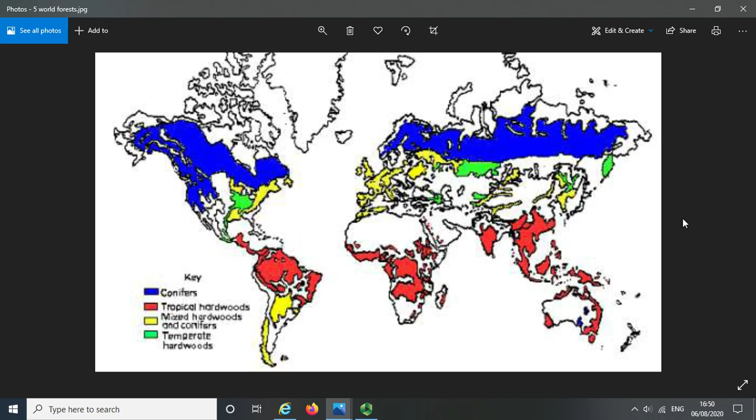Here's a kind of distribution map of hardwoods and softwoods throughout the world, and you can see fairly clearly that the northern hemisphere produces the vast majority of conifers, and the southern hemisphere produces the vast majority of tropical hardwoods, which is interesting in itself, and I'm afraid I don't have the reason for that, but when we're thinking about putting buildings together, that map might be relevant.

The other thing that's relevant to timber is how sustainable it is. It is the only renewable construction resource we have in the world, after all. It is the only renewable construction resource we have, and so how can we best use it?

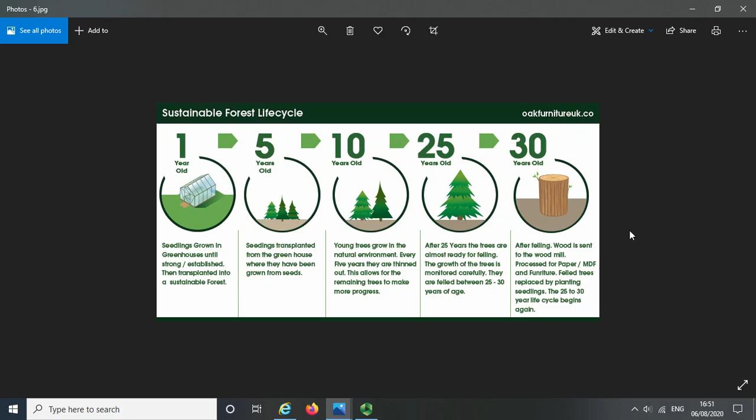What you're looking at is actually a kind of growth chart, I think mainly for softwood timber, and softwood timber is fairly rapidly growing, which is why we can harvest it at about 30 years, and certain kinds of tree grow in a very particular way, like straight, which is useful. Pine, for example, is a very useful tree for the construction industry.

Schauberger was the son of a logger. His father felled trees up in the hills, chopped them into logs, and sent the logs down to the lake through things that are called log flumes. The flumes were little channels that you put the logs into, and they went down to the bottom to the lake.

Now, you would think the quickest way from A to B is a straight line, but what happened was the logs, as they travelled down these flumes from the top of the hill down to the lake, would crash against the sides quite dramatically, and by the time they got to the bottom, only something like a third of them were still in a decent state to be usable. The others had broken quite dramatically.

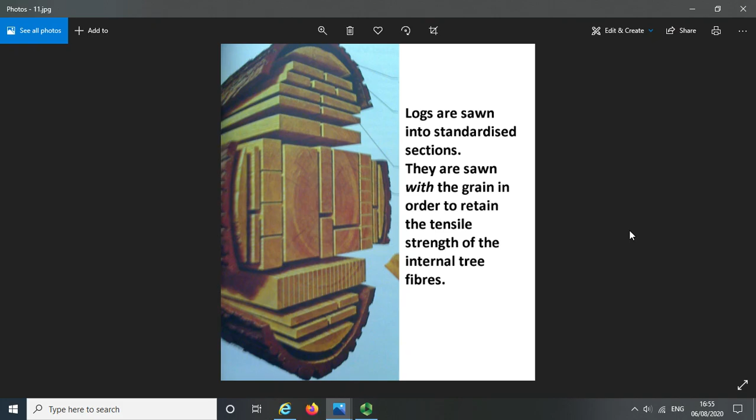And at the logging mill, they are sectioned into standardized shapes. And again, you already know that you work with the grain along the long length of the timber. You don't work against the timber, you work with it, because the fibers, as I mentioned in an earlier lecture, run linearly along the length of the tree, and we need that tensile strength. And so that's how the tree gets broken down.

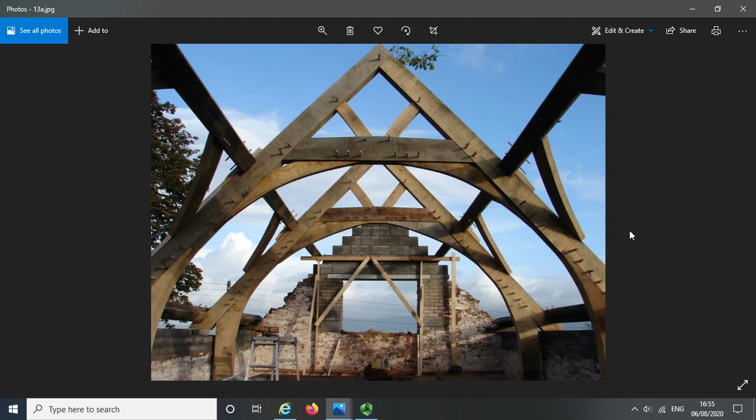And of course, sawn timber is still used in construction. This is a cruck frame, C-R-U-C-K frame, a very traditional way of, sort of an A-frame structure, a very traditional way of putting a timber frame together. It's doweled, as you can see. There's no metal, there's no screws or bolts used in this particular structure. It's a very nice way of putting wood together.

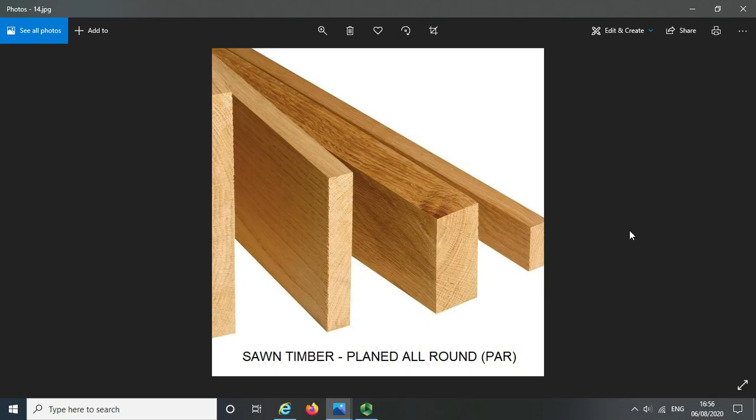And then the next processing of timber, as again I know you already are aware of, is to plane it, to put it through a machine that makes it, if you like, planar, much flatter all round. And then of course you put it through another machine that can actually profile the timber for you.

Now, the majority of timber that we use in construction nowadays will be engineered, and that means that it will be processed. It won't be sawn timber. Yes, we will use this, but generally speaking, it will be engineered, and that means taking small sections of timber and reassembling them, laminating them together. So it's sort of interesting.

Now that's fine, but when you cut that down, you will get a kind of general even distribution of loads and forces in the tree, and suddenly you will get what we call in English a knot in the system, and suddenly it's a lot more dense. Now, to redistribute knots and to make any piece of timber evenly able to resist load, you cut it into lots of smaller sections, and you redistribute the knots so that they're evenly distributed around the section, and you will actually have a stiffer and stronger length of timber.

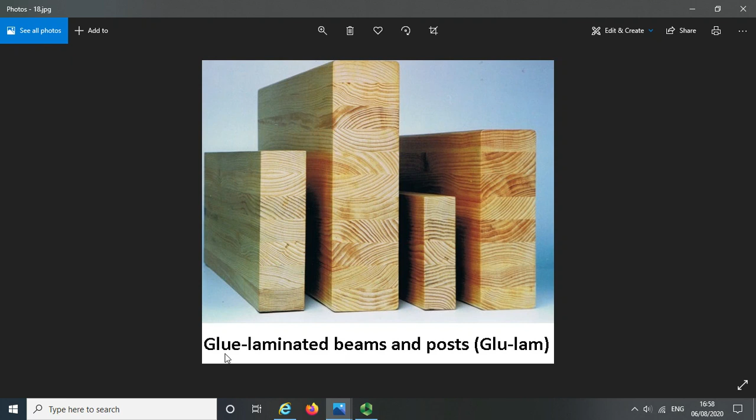Not only that, of course, if you're in an environment where you can only grow short lengths of timber for one reason or another, assembling, gluing, laminating timber together to make bigger lengths makes a lot of sense. So you might know the expression glulam, usually it's GLULAM, which we put together beams and columns with. Here's some traditional glulam.

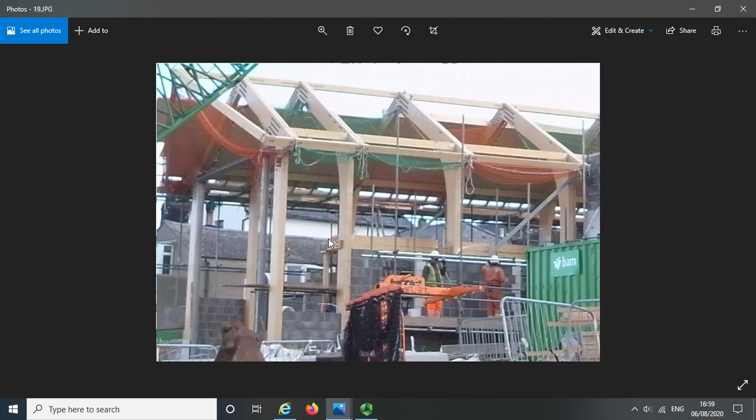Here's a glulam vault, a series of glue laminated arches, vaults. This is a Hopkins project actually, for a grandstand at the open air cycling velodrome in Herne Hill in South London. Really rather elegant use. I've never been sure whether these are strictly necessary to carry the cantilever. They probably are. These are cast iron columns, as you can see. They were apparently already there for the old pavilion, and they wanted to reuse them.

Excuse me. There you go.

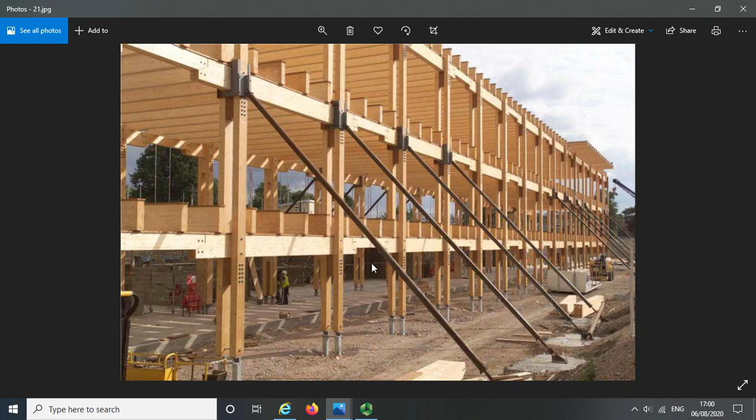So here we have a complete, if you like, orthogonal structure made from glue laminated engineered I-section beams and glulam columns. Interesting again, and I cannot emphasize enough this process of doubling, which is going on here, and also this process of keeping timber off the ground with a nice scarf joint connecting down to the foundations. So that's a good critical detail.

The doubling is important because you're taking mass away. You're reducing the amount of material that you use. We'll see this time and time again in structure, breaking it down into smaller elements. I nearly said elephants. Into smaller elements, and combining those together again. You're making a space frame, and the principle of a space frame works extremely well.

Of course, the other lovely thing about glulam is that you can laminate it into bending. So you set out on a bench the curve that you need. You put your first thin strip, you bend it into shape, you lock it into position. You glue your next strip, and actually the moment the second strip is glued onto the first strip, they lock together and the curve is made. The curve forms. It will not change then, it will not bend, and so on until you have a structurally efficient curve.

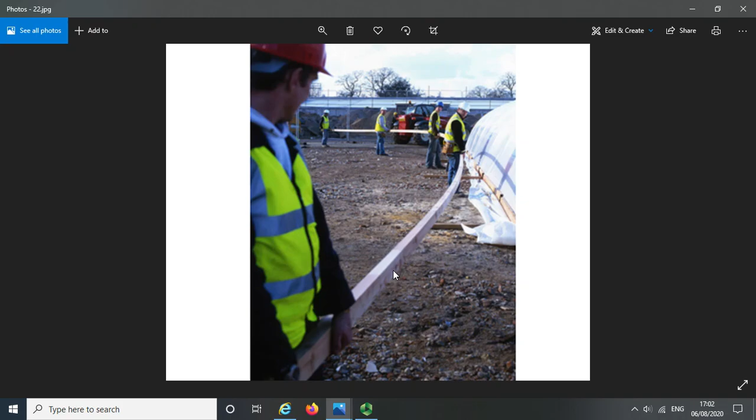I think this is one of the longest glue laminated sections that I have come across. And as I think I've mentioned before, bringing materials to site is a very energy intensive process. Wherever you're working in the world, it's always good to think, why can I source local materials and avoid all the energy that's needed to bring materials to site. But if you do have to do that, and you've got a relatively straight road, which I imagine you need in this place, the efficiency of building a long span beam, which this is going to be, could be to your advantage.

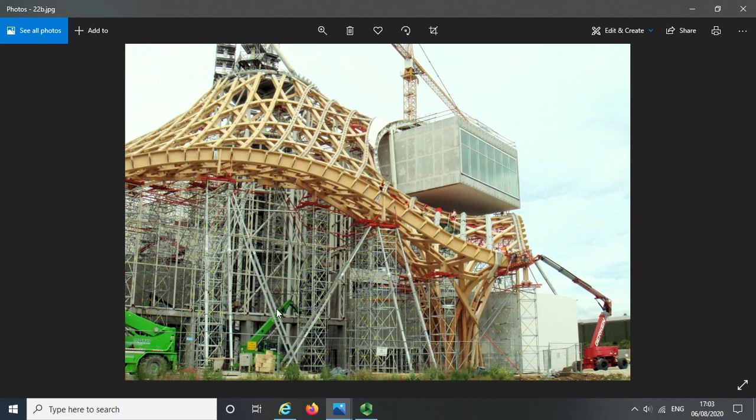So here's an interesting project, Pompidou Metz, using that principle of putting glue laminated sections into bending. Sorry, might be worth another look. I'll come back to this because this timber is actually held in tension by the shaping. This is not glue laminated in the way we're looking at just now, because again, here's the doubling. Can you see the doubling going on in both directions? And that's nice because you can kind of weave the material by allowing one direction of the weave to slot through the material that's going in the other direction.

The edge beam is critical because that's what in a way sets out the overall structural logic of the building. The overall geometry is controlled by the edge. It's exactly the same with tensile structures. You know, the wire rope along the edge is controlling the shape. So just to distinguish, all of what we were looking at just now was what we call glue laminated timber, glulam.

Sorry, my computer's being very slow to react for some reason. Not reacting at all now. Oh, there we go.

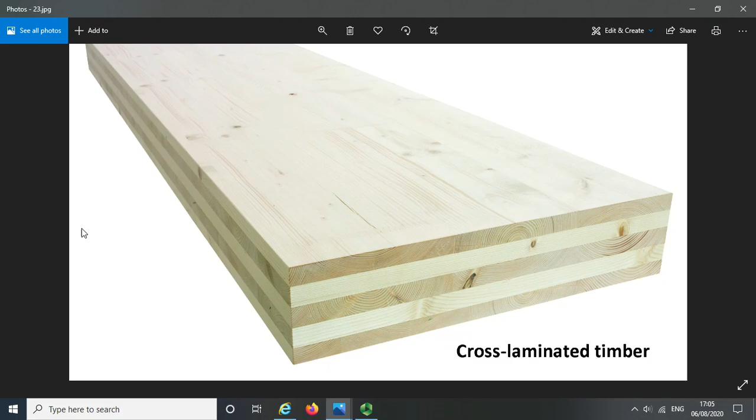Apologies for this. So what I was going to say was that we have to make a distinction between the generic description glue laminated timber and a development of that which is cross laminated timber. The difference is that with what was traditionally known as glue laminated timber, the grain of the timber was always in the same direction. You're just cutting it into smaller sections and reassembling those sections to make a longer piece of wood. With cross laminating, you're alternating the direction of the grain. Can you see that's going in that direction, that's going that way, and that's going that way? A little bit like the tradition of plywood, I suppose.

And what that's doing is giving you strength in all sorts of directions. So it becomes more like a floor or a wall, more like a load-bearing panel. So I'm going to use the phrase cross-laminated timber for long planar sections, and I'm going to use the phrase glue laminated timber for columns and beams. And I hope you can get your brains and mouths around that.

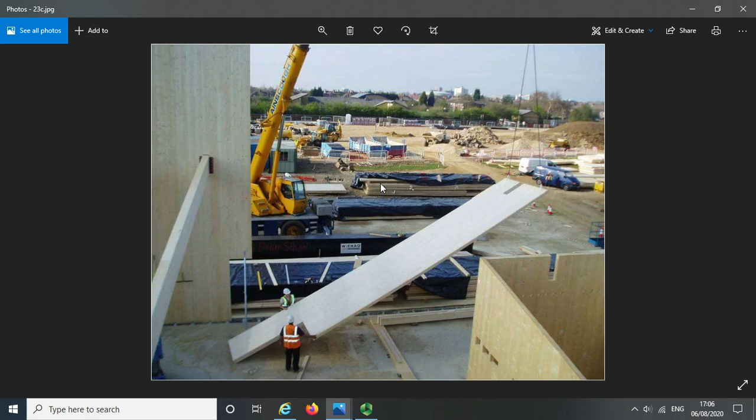Here's some more CLT, cross-laminated timber. More and more this is going to be the way that we put buildings together. So this is now a load-bearing wall made of CLT. It's actually a load-bearing wall. So we go back to that principle of masonry, stone, brick, reinforced concrete construction, where you're carrying floors and walls off load-bearing walls. Here's a combination of the two.

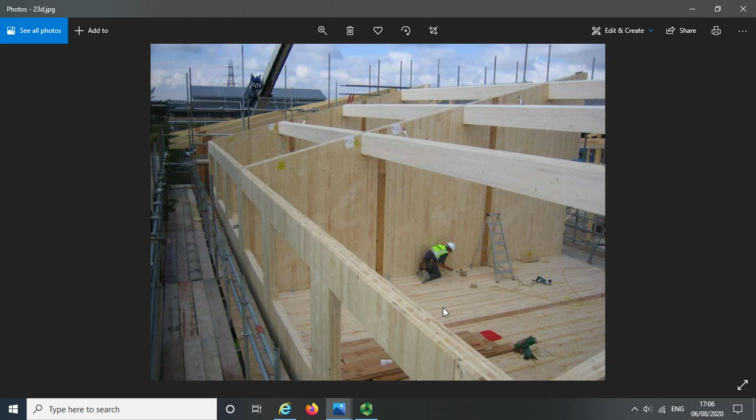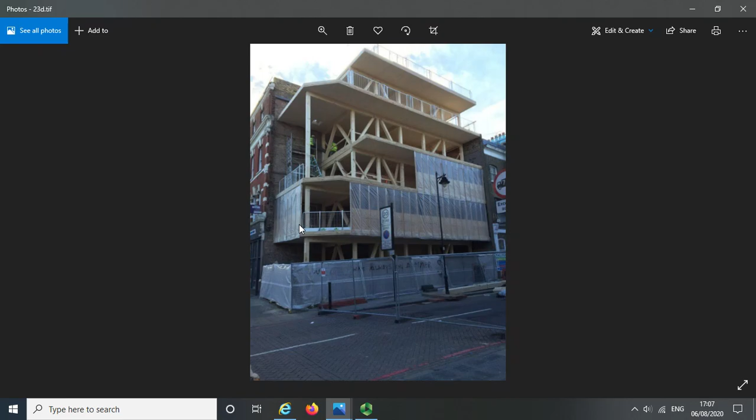I don't know if you can see, you can see the little knots in the timber that generally are redistributed, so they're evenly distributed around these sections. This is a nice project, which I will describe in a later lecture in more detail, by Amin Taha. And these are glulam columns. These are CLT, cross-laminated timber floors.

It just shows you what's going to happen here: all of this is temporary structure. There's going to be some outer walls which are actually precast concrete sections, rather interesting precast concrete sections, which will eventually carry the floors. So there's some temporary engineering going on here, isn't there? All of this is going to disappear. Again, when you're looking at your own projects, think about temporary engineering. Think about this process of how it's going to work.

They couldn't have put up the concrete walls first. It just wasn't practical. This is an awkward infill site, as it happens, in Islington, North London. So what do we have to do? We put a temporary structure in. We build the CLT floors. Then we put the walls in place, and that's what the building looks like in the end.

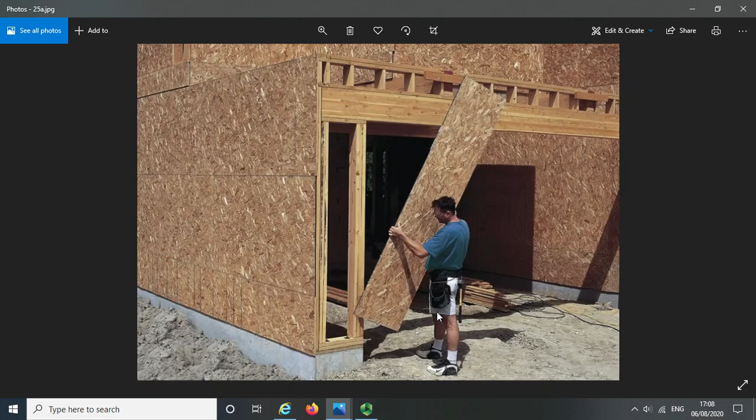And there's a nice detail, I haven't got it here, sorry, which is the junction of the edge of the CLT with these precast concrete sections which make up the outside facade. Lovely, nice, delicate little project, very interesting. Of course, again, a series of boards and sheets. I'm not going to go into this in a lot of detail because you know what these are already.

Again, whoops. I want to just remind you that although timber is of course the most sustainable material we have, it needs nurturing, it needs looking after in certain ways. Ideally, in an ideal world, you would always enable timber to be well ventilated, to get air around it. It doesn't want to get too wet and it doesn't want to get too dry. It needs to almost be alive. So we use the expression seasoning.

Okay, so even when it comes from the sawmill to your local timber merchant, it's gone through a process already where it's been dried. The water in the timber, the moisture in the timber, evaporates naturally, or it's actually artificially evaporated using kilns to heat it.

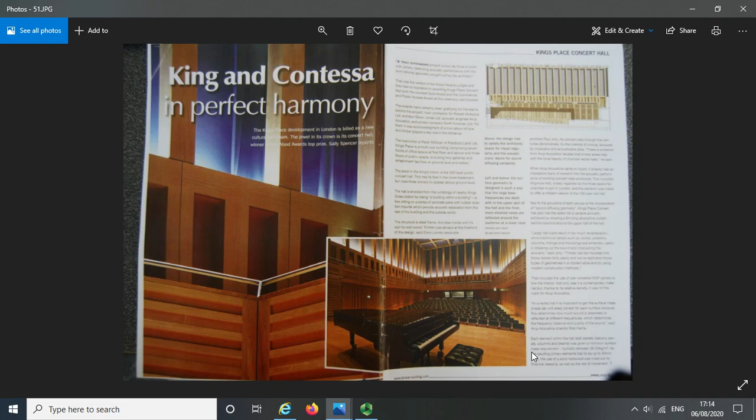the architects involved in this project went to the forest and identified a particular tree, gave it a name, which you would. I think it is La Contessa, King and Contessa, yeah. You give the tree a name, and you harvest that tree, and you use it in every way you possibly can. So this isn't a piece of engineered timber, including the veneer, even finally taking an edge off the tree to make veneers. That tree becomes an auditorium, and I think that is a very elegant project, isn't it?

Yeah. So I'm going to now move on to just a few points about connecting timbers together. While I think about it, I'll go back a second. While we're back on generally, there are now hardwood timbers that I'm not sure whether they're being genetically engineered or whether they've just been discovered, that grow a lot faster, pretty much almost as fast as softwood. I'm thinking, for example, of tulip wood, which is also known as poplar, grown in the USA, and they say they can grow a hardwood tree in 30 to 40 years, which is interesting.

Now, if you look on the data sheets that we've provided for you on your Blackboard website, you will see there's a lot of links to very good timber websites. One is just a general database of all timber types. So that's interesting, because wherever you're working in the world, you can look at your local forest. So if you have got timber growing, you think, what can I usefully do with this timber? There's a number of

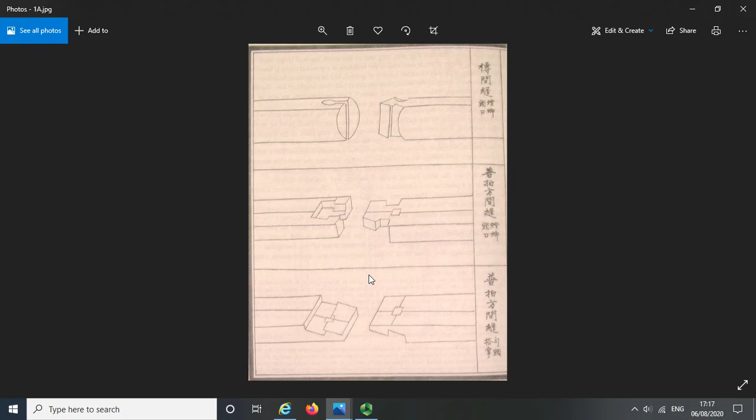So yeah, just a few quick things now on how you join timber. Joinery, the traditional way. Interesting because it dates back. That's a scarf joint, by the way, joining timber end to end, which has always been awkward. That can resist pulling away, can resist tension, can resist torsion, and can resist compression. This is at least 1,000 years old. Chinese drawing, I beg your pardon, of timber joinery.

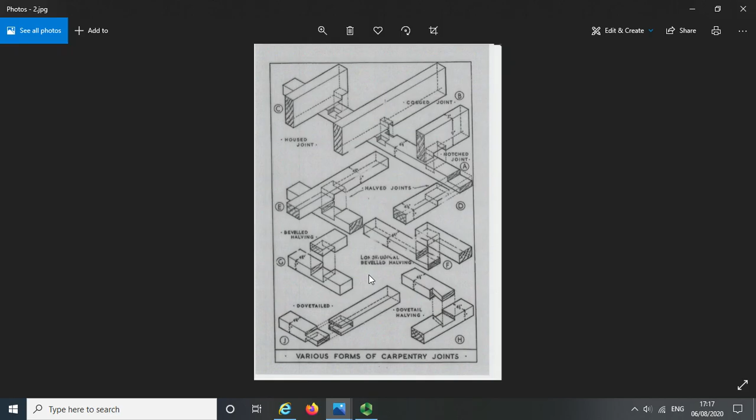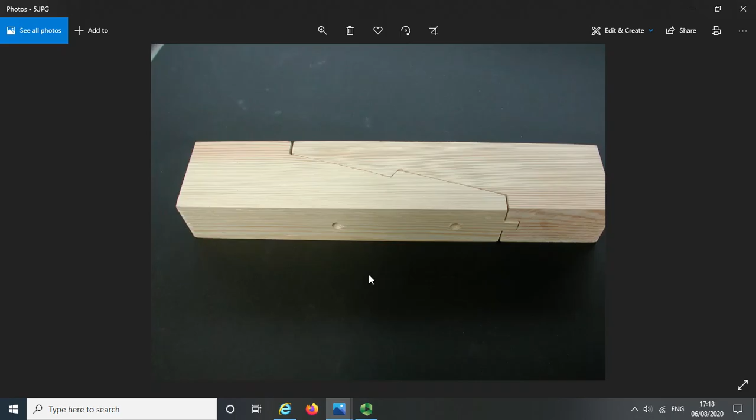The good thing, of course, about joinery is that you're just using the one material. We talk about dry joints. This is a dry joint. There's no glue, and there's certainly no other materials. There's no steel, there's no nailing, there's no screwing. So you're just working with the material itself. What an interesting way to put architecture together with dry joints. Oh, here's a scarf joint. Sorry about that. Oh yeah, here's another one.

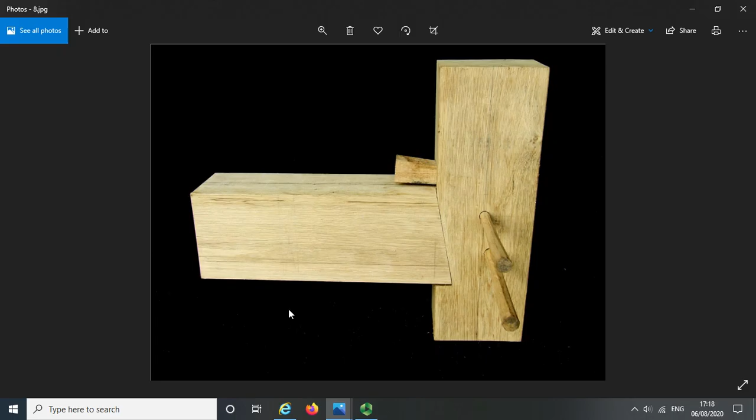This is a nice detail on this scarf joint. So you can see if you try and pull on each end, it's going to resist, to some extent, the pulling. These dowels help. Often they'll put what's known as a butterfly joint in here, and that will be hardwood. So this could be softwood, that'll be hardwood. Here's a dowel which is hammered in, and this is a lovely little wedge. And often they would use hardwood for this wedge.

Once that was flush with the surface, as you can see, you'll get a circle and you'll get a rectangle of a slightly different color timber within that circle. I'm sorry I haven't got an image of that, but it's a very nice, very elegant way of joining timber. And there's a nice trick.

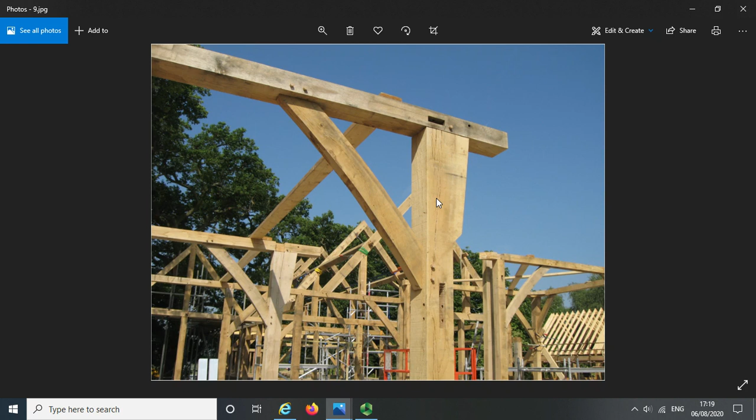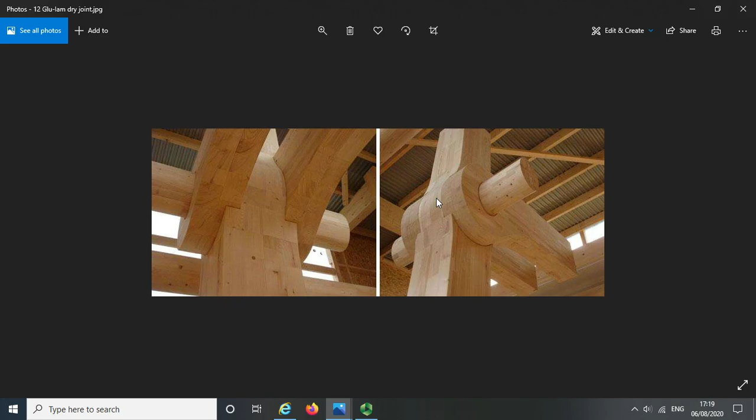So there's a lot of complexity in this, and that's an engineered timber version - this is green oak, obviously using sawn timber, and here's the engineered timber version of it. By the way, in your study materials there will be a PDF of a lecture from WIEHAG, who are the biggest engineered timber manufacturers in Europe.

They're in Austria, and you can have a look at that PDF. I'm not going to go into too much detail here about metal connectors - I'm sure you're very well aware of them. Just reminding you of the importance of keeping timber off the ground.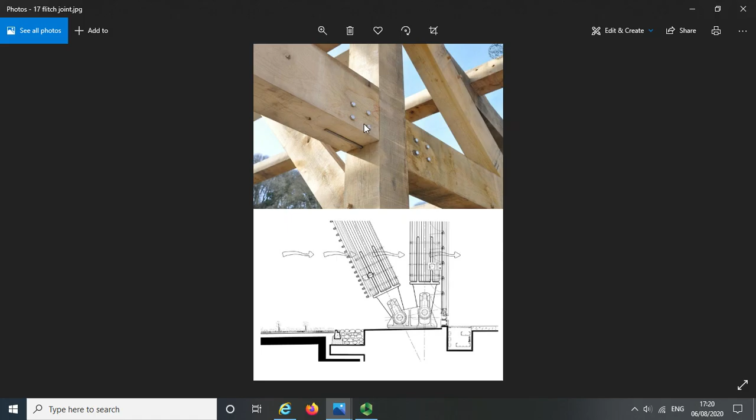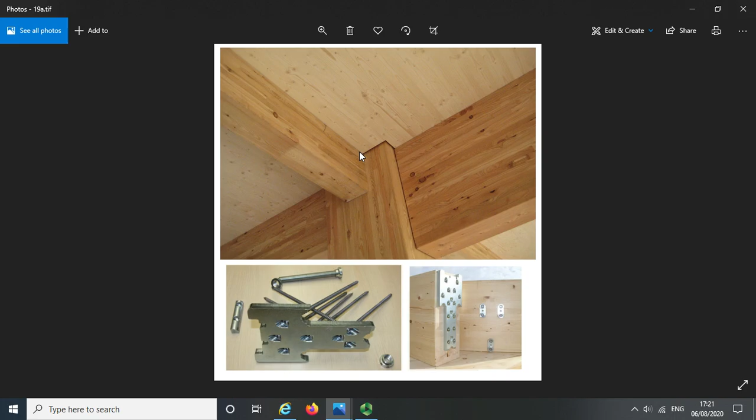These are nice, they're called flitch joints - F-L-I-T-C-H - where you slice into the timber and make the connection. There's a pin joint doing that. Very nice detail if you do have to use steel in your connectors. That's actually from the WIEHAG factory, where they're joining some huge curving glulam sections that are going to become vaults with a flitch joint, the same kind of joint. They like to do this clever stuff where you end up with steel connectors but you don't see them. We would like you to be thinking about these kind of details.

This is interesting because there's a couple of things going on here that I've often talked to students about. This is the Downland project by Ted Cullinan, Edward Cullinan Architects, some years ago. It's a beautiful barrel vault, but offset arches, and you can see the doubling process going on here, because the timber members are thin enough to flex.

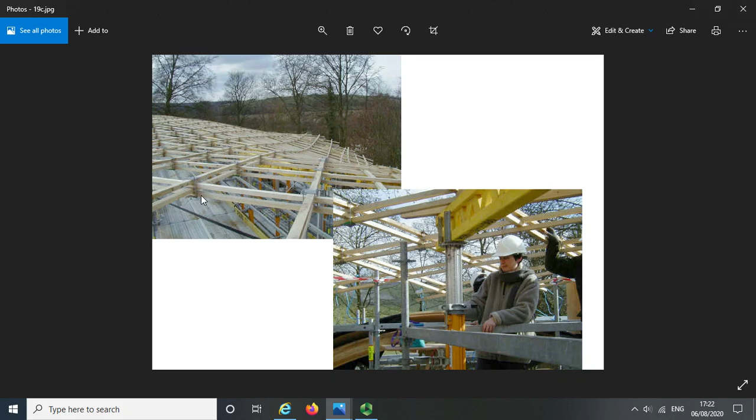It's actually built flat - that grid was built flat on the ground, and then as you can see it's propped up. These pneumatic posts gradually push the vault into position, and then two things happen when it's up. One is it's locked at each connection by this detail. As I've often said - it wasn't me that said 'God is in the details', Mies van der Rohe did - but the architecture is actually this little node here, which locks the two. It's the beautiful doubling of the timbers going through, and the design of this bespoke node. And of course at the ground level, which you can't see here, it's locked by a concrete foundation at each end, which stops the vault from splaying out in either direction.

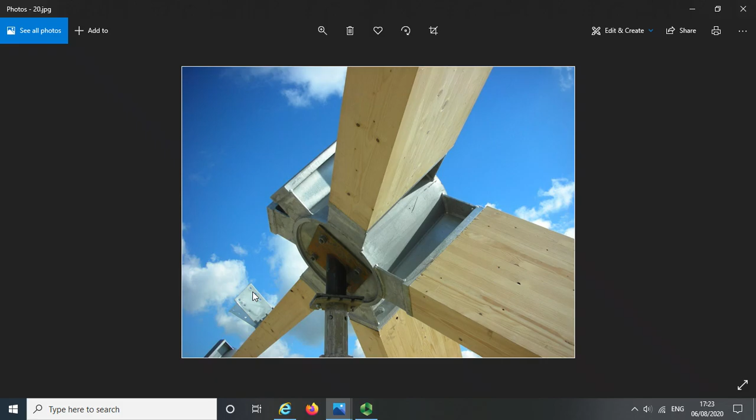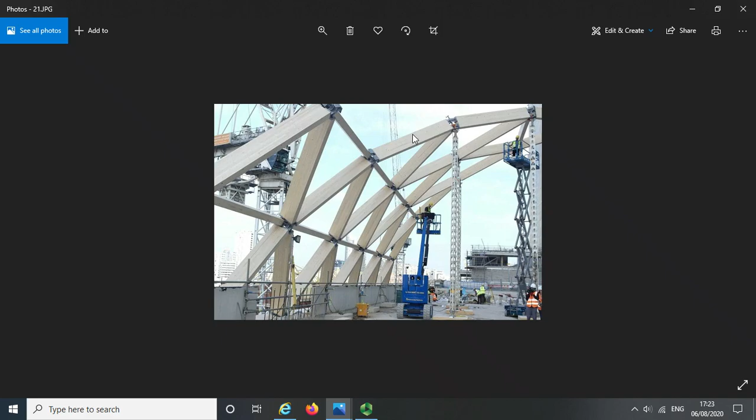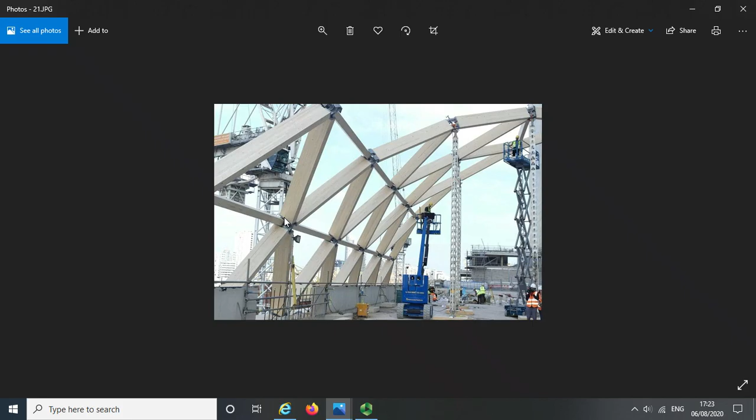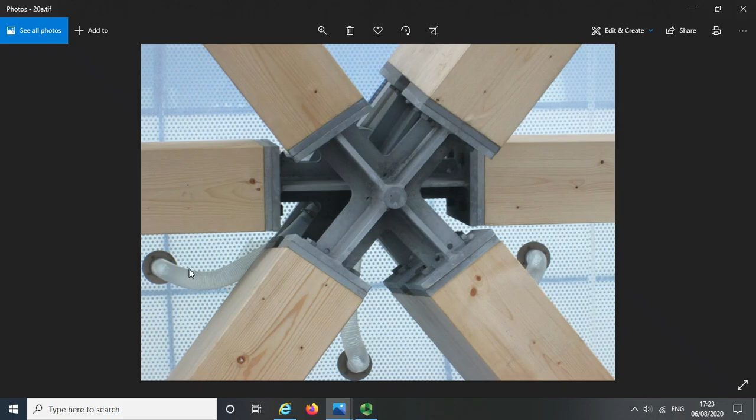This is a more modern version - this is Foster at Canary Wharf. This is a similar kind of vaulted structure. These are simple engineered timber sections. Of course you could have designed a big curved engineered glulam beam, but it's cheaper and more efficient in terms of construction technology to just have square ends, simple orthogonal sections, and all the work is done by that node where they connect together. That's the architecture again in this case - a load of simple square sections. What you're looking at here, by the way, is ETFE pillows, the inflated membranes which are keeping the wind and rain out, and that's the air supply to them.

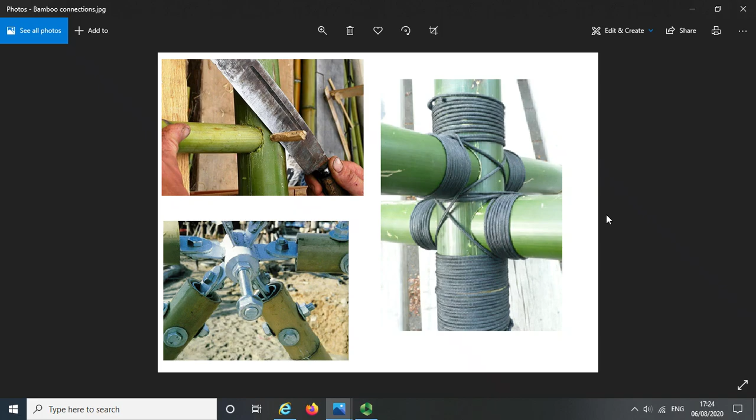So finally here, how to join various ways of joining bamboo, which is quite nice, isn't it? You could join anything, can't you? There's the joinery - that's lashing, that's the kind of yacht technology - and there's the steel, the adding steel solution.

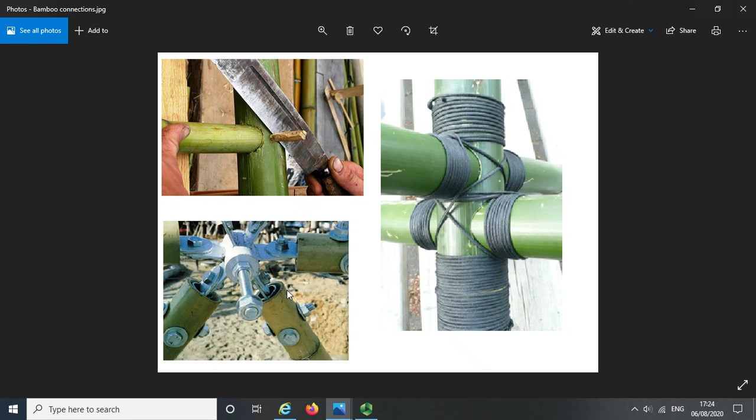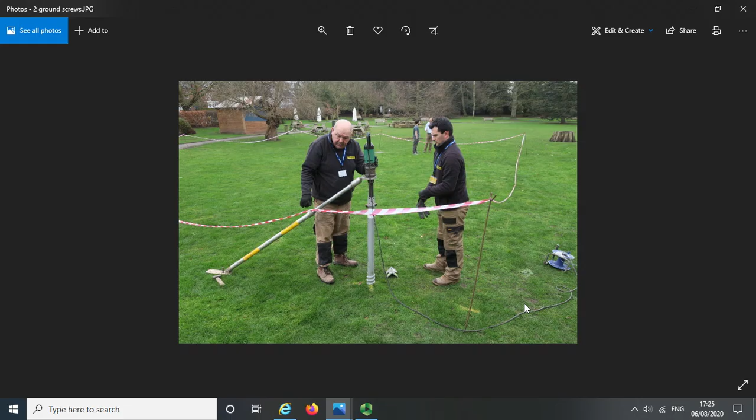Yeah, I think that is it. One more thing I wanted to show you very quickly, and this is not just about timber, but partly. This is a project by Structure Mode, a company I've mentioned, engineers who come in and give us lectures every so often. Jeff Morrow is their director, and this is a temporary structure, worth looking at partly because of these nice screw piles - this is at the Dulwich Picture Gallery for a pavilion.

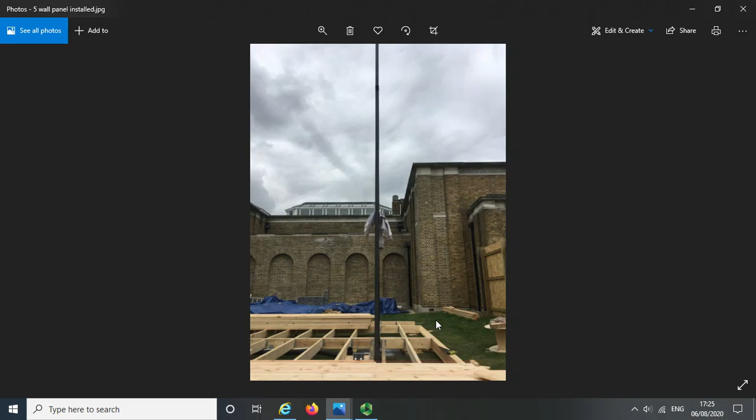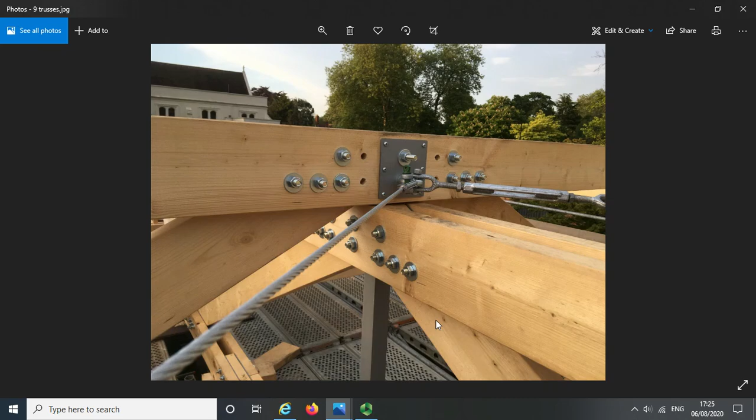Starts off with a series of screw piles - that's taking all the load. Here's the timber floor - I beg your pardon, this is the roof, and that's what's beautiful about it. It's a series of trusses. Here's the bolting again. It's pretty light, using tensile members where it needs to. There's the old yacht technology - there's a turnbuckle. There's a lot going on here, but very elegant.

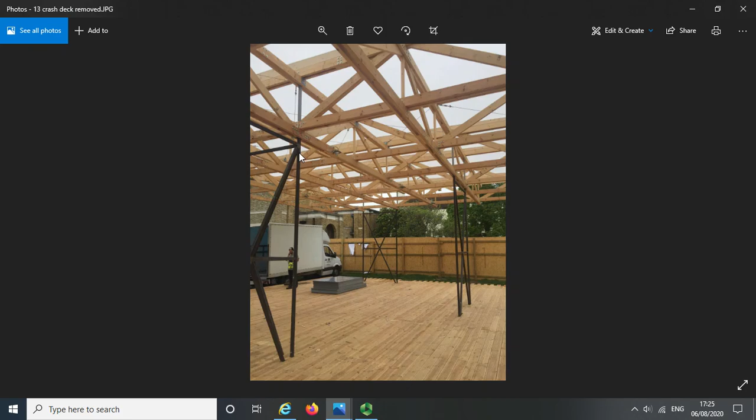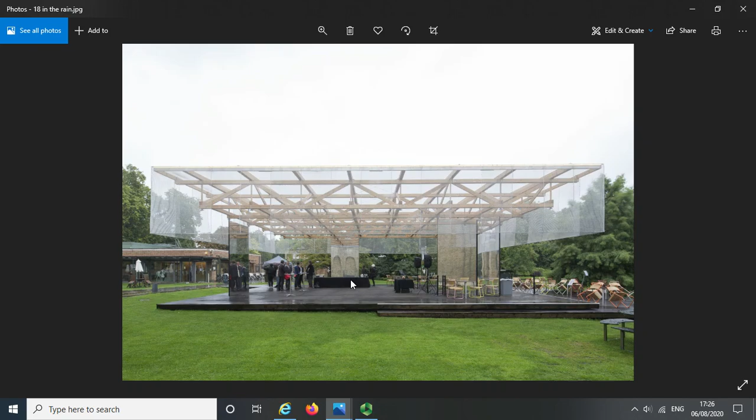The roof is built on the ground and then propped into the air on very delicate steel frames that are holding the roof in the air. This is not glulam, it's a sawn timber roof, and quite cleverly the architects put mirrored glass on the steel frame, so it sort of seems to float. Nice little project - I think that will be that for timber.

So yes, wood, lumber. Thank you very much.